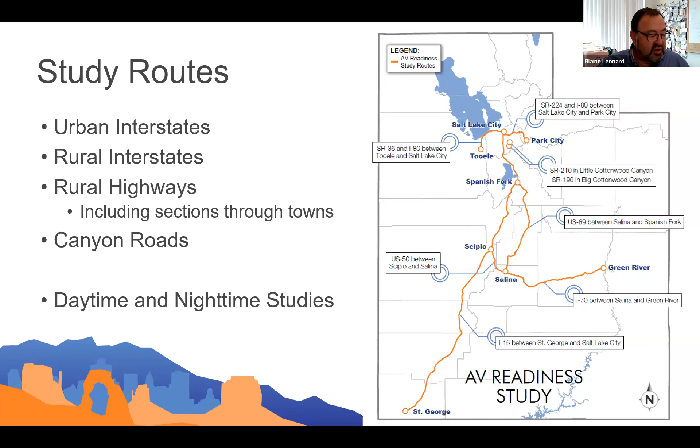We considered trying to do some studies that compared clear weather with rainy weather. We weren't able to figure out how to turn the rain on when the study was going on. So that didn't really happen, although we would be very interested in that if we could figure out how to time that appropriately. So that's sort of a summary of why we did what we did.

We're going to get a good detail today from Peter from UDOT and Phil from VSI about what we did in this study and how it works, how the systems work, and what the results were.

The study identified a few elements of the surveyed roads that need improving, such as restriping occasional faded or missing lane markers, adding on-ramp and off-ramp blend area striping, covering up ghost marking or lane scars, and utilizing high-contrast lane markers.

This allows us to start planning our maintenance operations in UDOT to say, here are the standards we need to meet with our pavement stripings, for instance. Here are the problems we need to fix. Here are the issues we need to solve.

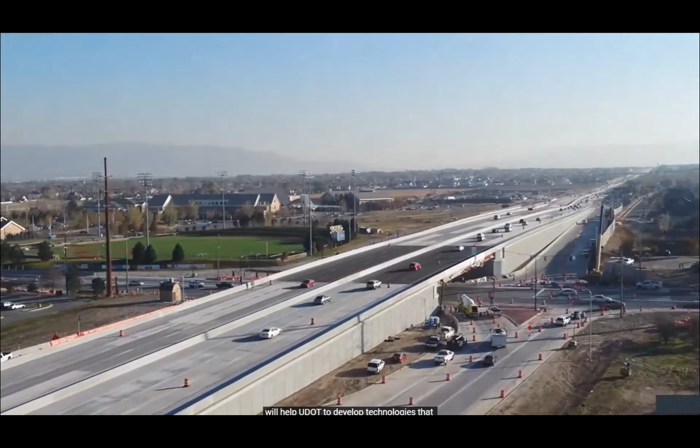To further Utah's vision of connected and automated technology in our state, UDOT will continue to research and gather data to improve AV readiness. Studies such as this will help UDOT to develop technologies that will move us significantly toward our vision of zero fatalities, improve mobility and access, and bring quality of life and economic enhancements.

Perfect. Hopefully that video helped to explain the deployment that we'll be talking about today.

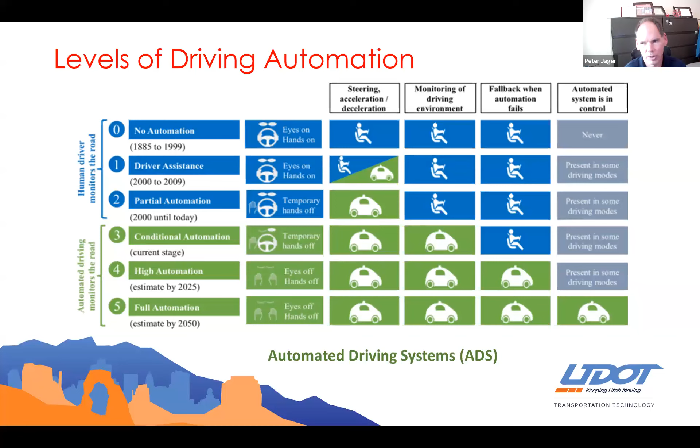But 3 and 4 are starting to be seen on the horizon here, what we're studying, where there is some partial automation and robo-taxis that are starting to exist. And in some cities, we have Cruise, we have Waymo, where you can hail an automated vehicle that comes up and picks you up, drives you somewhere within a limited area, but with no human behind the wheel. It can fully drive by itself under certain conditions and within a certain operational domain. So here, what we're looking at as the state is to see how these vehicles will operate on the roadways today.

So our primary goal here, as Blaine mentioned, is safety, 0 fatalities. UDOT is focused on improving safety for all users of the road network as well. The 0 fatalities doesn't just apply to vehicle crashes, but to protecting all users, from pedestrians to cyclists to transit users. So we need to know how vehicles will operate, not just the ones people are driving, but how automated vehicles will operate. And even today, most new cars are sold with these technologies such as lane keeping assist, automatic braking, and adaptive cruise control.

And here's more description of these technologies. So even though level 5 is far out in the future, these technologies are here now. These are on the road today. Lane departure warning, a warning system that'll warn you when your car's drifting off the road, whereas lane keeping assist will actually nudge you back into the lane, kind of like having bumpers on the side of the road to keep your vehicle in the lane. And active lane keeping or lane centering actually puts your car in the middle of the road, keeps you driving down the center, kind of like being on rails.

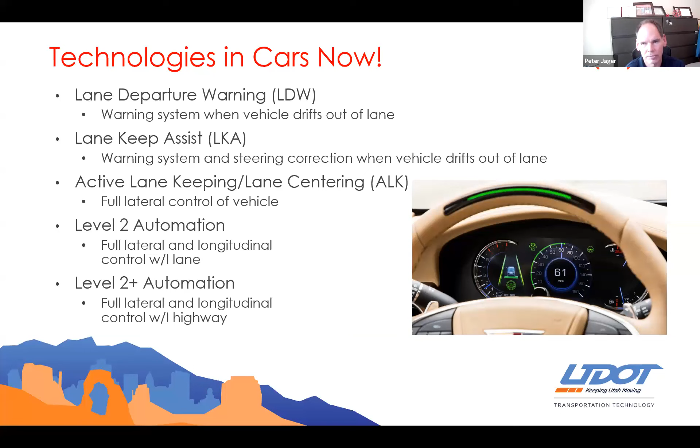So I'm going to kick it over to Phil here to talk about how cars read the road. He's going to talk more about the technology that was used in the study, and then show some of the data samples that were collected across the state as part of these studies.

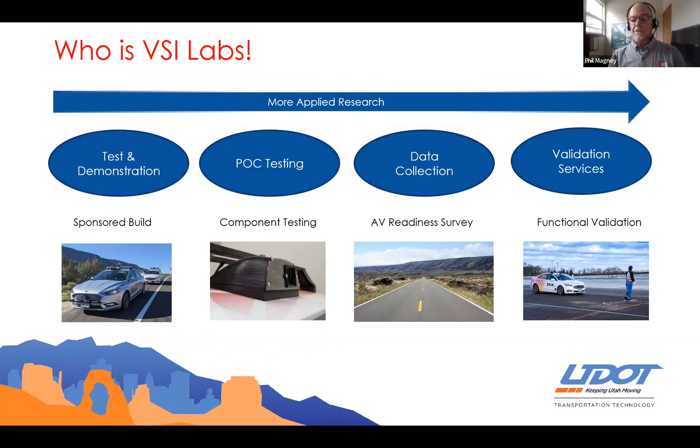So just a few opening remarks about lane markings. Really, when it comes to these technologies, they're the rails for automated driving systems. They really are the ultimate ground truth, and they do have the highest priority when it comes to applying technologies to determine where the car is going. So even if you have a highly automated vehicle with high definition maps, for example, and precision localization, and you're able to operate even when you cannot see the lane markings, in a situation like this, your GNSS probably isn't going to be accurate enough to even make that work. So at the end of the day, you're always relying on the actual lane markings to give you that ultimate ground truth.

Nowadays, it's important to point out that really most of your lane detectors are convolutional neural networks. So those are AI-trained detectors. AI has really been making its way into automotive for about the past 5 or 8 years even, because AI is really an excellent application for image classification.

And the other characteristic with AI-based detection algorithms is that they can evolve and they can adapt. As new data is collected, those algorithms get retrained, they get smarter, they're able to handle different types of situations better, and those algorithms get pushed back out to the vehicles in the fleet.

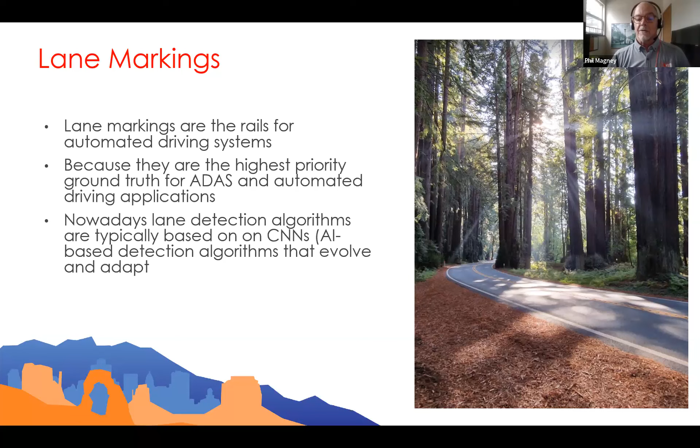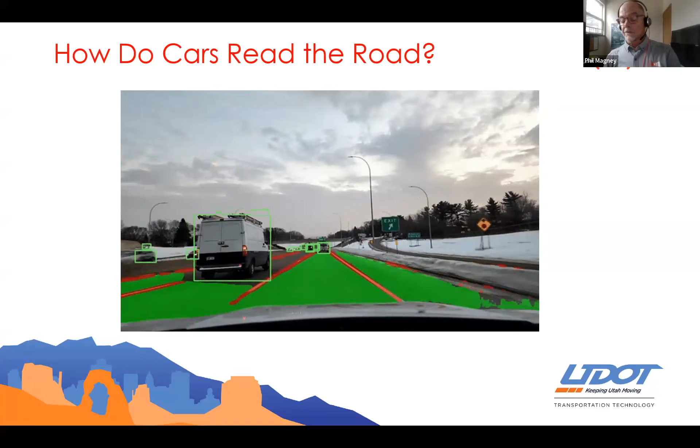The greenish area is really examining what we call drivable free space. That's telling the vehicle, look, here's the road, never mind lanes, this is the road, and don't even think about going off the green. That's what we call free space detection. And then obviously it's classifying vehicles as they go by, and it's doing a pretty good job even with the oncoming vehicles. So again, this is what the car is going through.

But the fact of the matter is, you can do a lot with cameras when it works really well. It's amazing how advanced these algorithms have become, even in the last 2 years since we started this study. The algorithms and the cameras are getting so much better too, especially at dealing with contrast and situations like that.

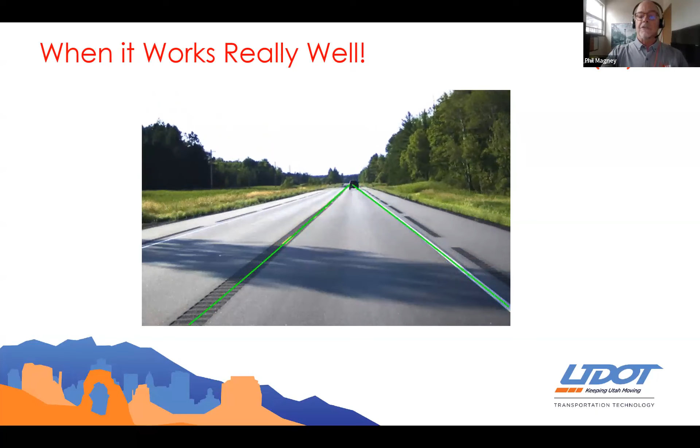Yeah, this is US Highway 2, up in northern Minnesota. It's operating on rails here. That rumble strip in the center doesn't hurt. In this case, it's not having any trouble finding the lane markings. But if those lane markings were a bit faded, having that rumble strip is actually going to enhance the detection. So we're going west with our survey in a couple months to do US 2 in Washington State. So we're looking forward to that.

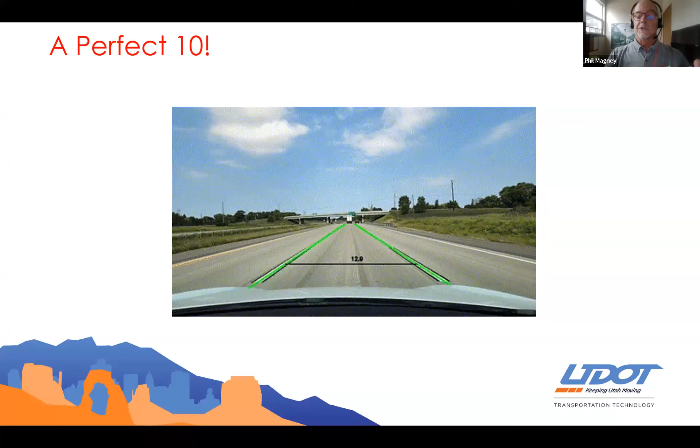A perfect 10. It's a little pixelated here, but it doesn't really look that way. A perfect 10 is 99% KPI ratings. And like I said, when it works really well. This happens to be a section of I-94 that's recently been resurfaced and done so with CAV in mind. A lot of new materials were used, different applications and so forth. We have a whole segment on I-94 that we're going to be ready to release in the next week.

So what is it? Okay. It's a survey to determine if automated features are safe on your roads. As I said, we're really out to measure the machine readability of these roads. And our goal is to call out areas where the driving systems could potentially fail. Likewise, we also call out areas that work really well, just so we can see what's going on there too. It's interesting.

And then we call out other areas that may prevent safe operation, whether it's limited shoulder width, or maybe too tight of a curve, or maybe too much of a slope and you can't see far enough ahead. So our goal is to really provide actionable insights that can be used to heighten the safe operation of these ADAS and automated driving features.

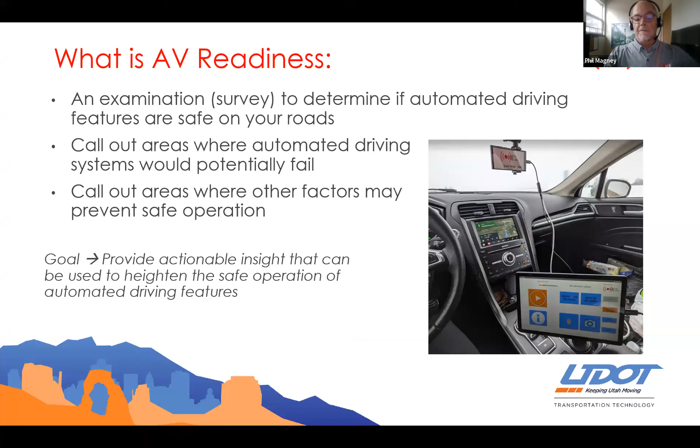So what messes things up? Well, it's all about contrast at the end of the day. These detectors are looking for longitudinal patterns, okay? And it's interesting, we'll see in a minute, but they'll actually detect seams and joints and things like that. Likewise, they can detect lane scars and rumble strips and surface material changes as well. But the contrast is key.

And against concrete surfaces, for example, in wet surface conditions and so on. Lane spacing and gaps, especially in blend areas for ramps, that causes boundary conditions. That's probably the #1 complaint of people with these technologies, is that when you get in a wide blend area like that, the vehicle will start to wiggle. Worst case scenario, on an off ramp, it could inadvertently take the off ramp.

The geometry, as I said, slope can limit the look ahead range. Didn't really have too much of an issue in Utah with that, except for the canyon roads, there we had some tight curvatures.

False positives, that's another issue that we're measuring. You've probably heard of phantom braking and things like that. That sometimes is caused by some infrastructure. And usually it's permanent infrastructure, so there's not a whole lot you can do about it, other than the makers of the radar can use it to better filter potential false positives.

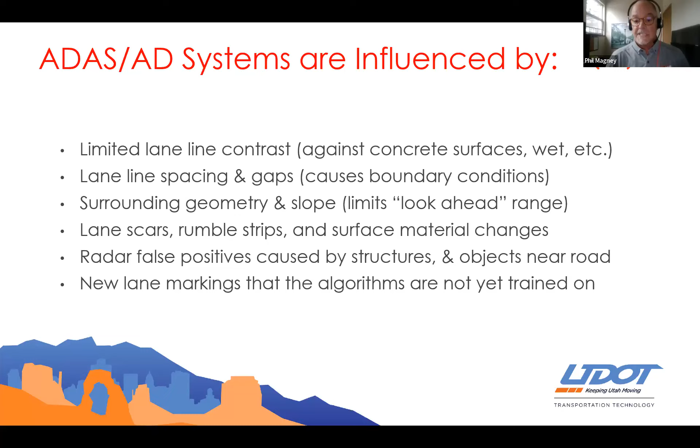And likewise, new lane markings that the algorithms are not yet trained on, that's key here. And this is the way these AI-based algorithms work. You train it with ground truth, so with all kinds of different variations of markings that it's going to see, and that is going to substantially improve the outcome.

So yeah, we do it all with a camera. We also have a lidar, and we also have radar, but since all these applications rely exclusively on the camera, that's what we're focusing on, is what the camera sees. So that's the look ahead range. That's an analytic, that's a number, based on a given threshold.

The stability of the lane detection, the confidence of the lane detection. Confidence is a number that the algorithm spits out, and when it falls beneath the confidence level, that's when the system is going to ask the driver to take over, or your automated lane keeping is going to go away or be shut down.

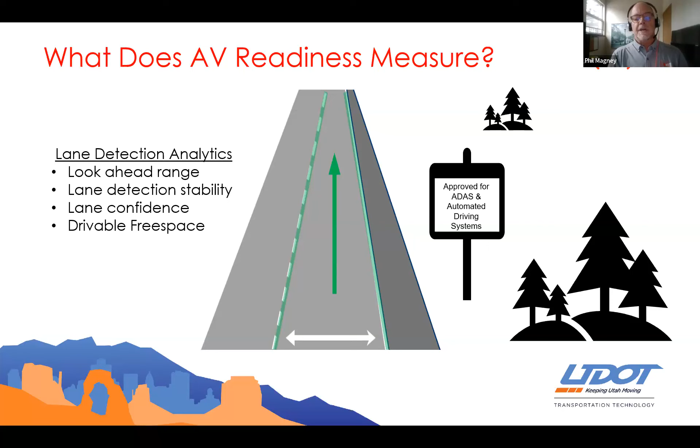And then drivable free space. We measure the width of the road now, or the width of the lane, and I mean, most of the time we know what it's going to be, but it does vary.

We operate these vehicles, they're loaded with technology: lidar, different kinds of lidar, different types of cameras, thermal camera, radar. You can see the rack system, so we can constantly change things out. We also record from behind the windscreen too, because that's important. That's where most of the installations actually happen. So that's actually a better placement. Plus, it keeps the sensors dry.

Because I tell you, when you're operating in a heavy storm, these sensors can't see anything, to be honest with you. And if it's ice, they're going to get coated and covered in no time. So really the only thing that's going to work effectively is sensors behind the windscreen, or some other mount module that's got heating and cleaning elements in it. But for our purposes, we can collect high fidelity data with our setup. We can create a digital twin because the fidelity is so perfect with the full data set.

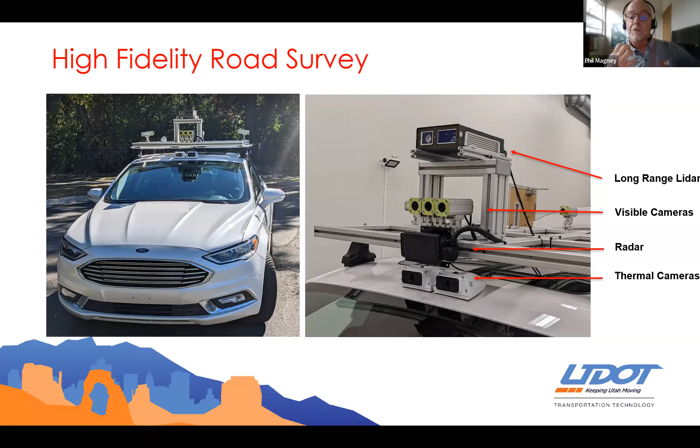We also operate a dashboard now. So our surveyor console, when we hit the road, we've got this console ready to start recording, to tag what type of situation it is or what the weather's like. We can preview our cameras. We can see how much storage we have left. We can even monitor the temperature of the computer. So we're pretty proud of that.

And then best practices. So we're running these in shadow mode, and driving a perfect line, because that's best practices for creating analytics. And then when we post process the data, we can call out all these anomalies. All the data is recorded with a lot of computer gear associated with that, and a lot of storage. The surveyor operates the console. Sometimes we'll have an engineer in the seat operating the console. It just depends on how busy they are or what the situation is like.

Driven at posted speeds. Again, best practices. If it's a multi-lane highway, we drive in the right lane unless overtaking. Okay, so this is going to expose us to all the ramps. Generally, if you're in the center lane or the left lane, you're not going to be able to pick up the ramps. So we drive a proper human line.

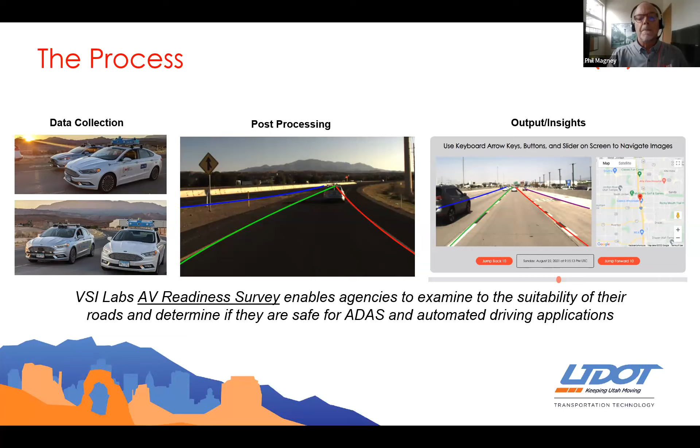We use 3 different detectors nowadays. We run an Apollo lane detector, that's open source. We run a LaneNet detector, that's open source. We also run YOLO-P, which is our most efficient and highest performing algorithm. These are open source. There's a lot of open source tools, but it doesn't mean it's plug and play. There's a lot of parameters that have to be set up to make these work properly.

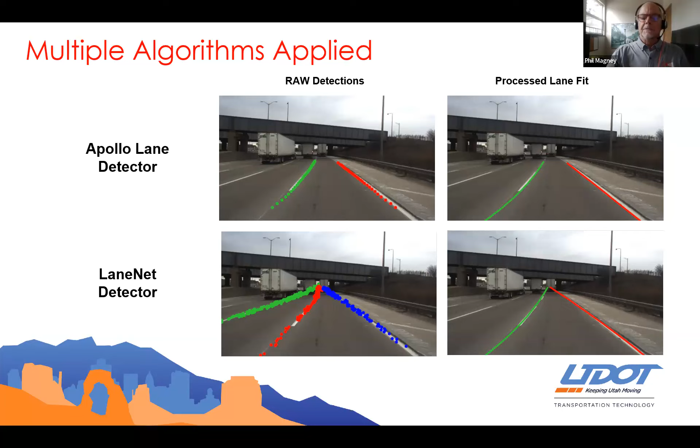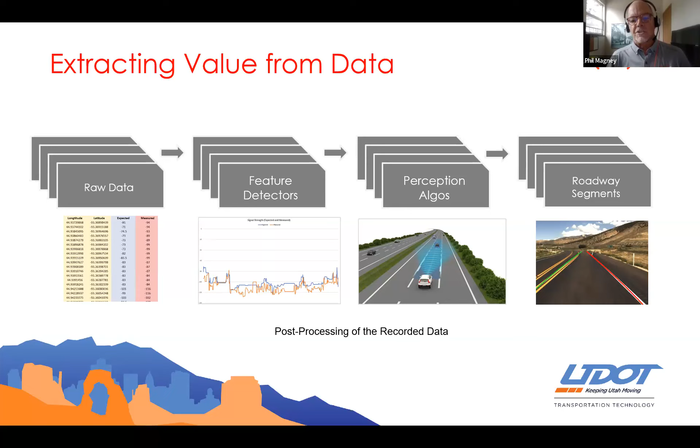And it starts with massive amounts of data. I would say in Utah, we probably had 6 or 10 terabytes of data in all. Ultimately getting that into actionable insights is the goal. So we run all kinds of algorithms on it, and post-processing of the recorded data, and then ultimately it produces the output for the roadway segments, or the campaign, as we like to call it.

This is a common scenario that anybody driving with these technologies, I think I mentioned earlier, gets frustrated with all the time. The one on the left, it can't help itself. It wants to center itself. And so when you get to this unmarked blend area, the vehicle will start to wiggle a bit. It can be mildly annoying, although not necessarily dangerous. You might say, well, why don't they just bias it to the left? Well, that would create other problems. But they're getting better at that. It's still there, though.

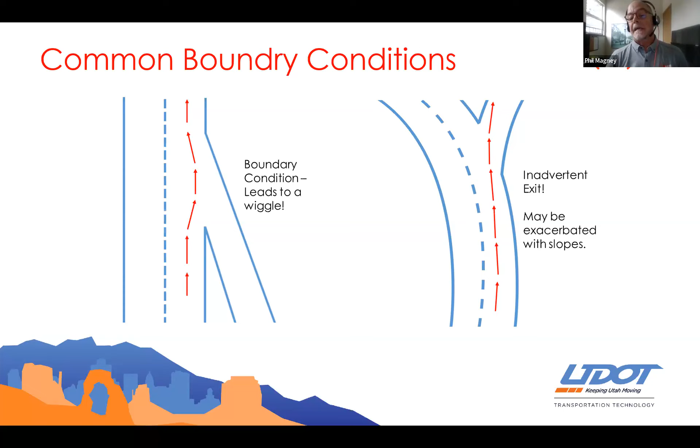On the right side, you may have a scenario that can lead to a more serious situation, particularly on a bend like this. The vehicle could easily just go straight and then ultimately get caught in that off ramp, and at speed. So, the obvious answer to that is these dashed markings. I think they're probably equally beneficial to humans or to the machine.

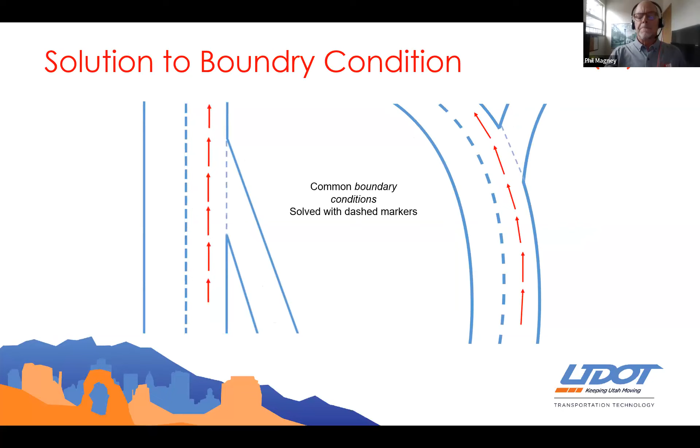So we talked a lot about the route, and so I'm just going to skip that. You got it loud and clear from Blaine earlier that we covered a lot of diversity in the road types, and so we were kind of covering all the different bases.

General observations are as follows. The interstate performance was generally very good, except areas that have been recently resurfaced. It's pretty obvious there. Not calling out the ramps here, I guess that's the next bullet anyway. We did test I-70 in both day and night, but generally speaking, interstate performance is good for all these technologies. And furthermore, I would say, if there was ever a place to use this stuff, it's going to be on the interstate. So the technologies are going to be switched on in a good percentage of those vehicles.

Ramps are probably the leading cause of confusion for camera ADAS systems, as I mentioned in the previous slide. Performance on the rural highways is generally very good, probably better than expected, to be honest with you. And we've found this in some other states as well. Some of these federal roads and state roads, even though they're 2-lane, are highly suitable, and you can expect that the technologies would be used a lot on those types of roads. The canyon roads were very challenging, tight curves, vulnerable road users, or too much traffic problem.

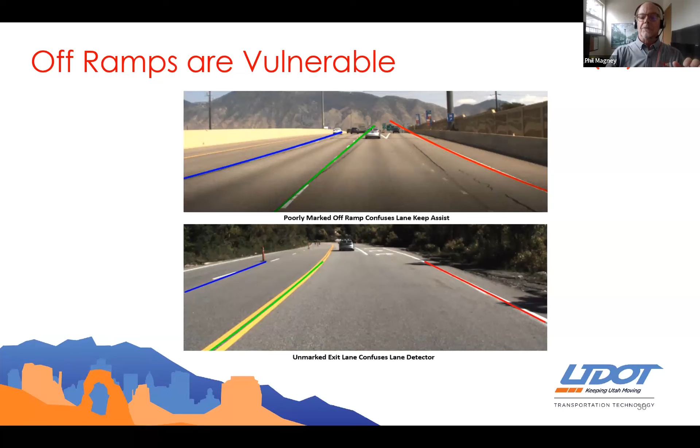This was in the video, of course. Normal detection. 5 frames later, misdetection. This is the ghost marking or previous marking that was still somewhat visible. Generally speaking, you can live with ghost markings as long as your main markings are strong and in good shape, because they'll take priority.

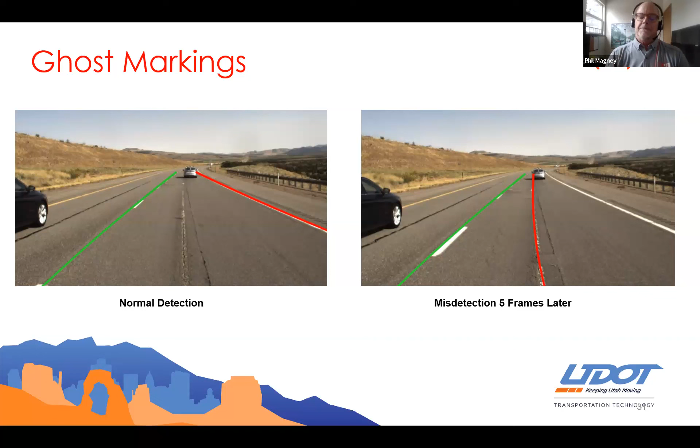You can get misdetection from tire marks, as I mentioned, or from expansion fillers, as I said earlier. It's looking for those longitudinal patterns, and it's going to build a line where it thinks there should be a line, okay? And so if you drive a Tesla or any LKA car, you'll probably notice the similar type of performance where it's able to attach to a seam.

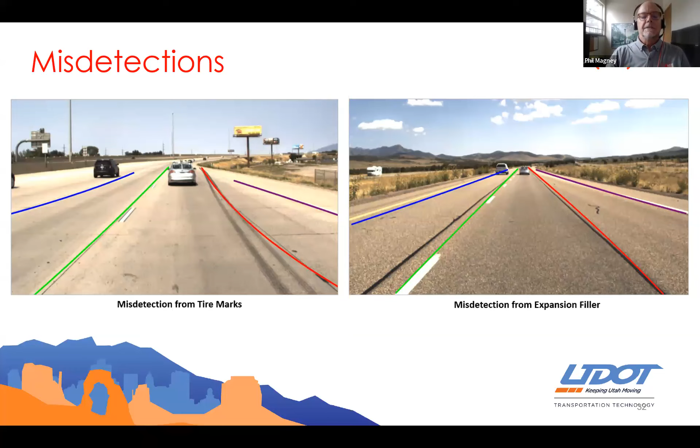In the right picture, obviously that seam just happens to coincide with where the lane marking should be. So same with the tire mark on the left. So that ended up working out.

Day and night performance. This is a very good stretch of road, particularly here. Detection is very solid, probably better in the day than at night. The retroreflectivity, I think, was pretty good, and so we didn't really have any issues.

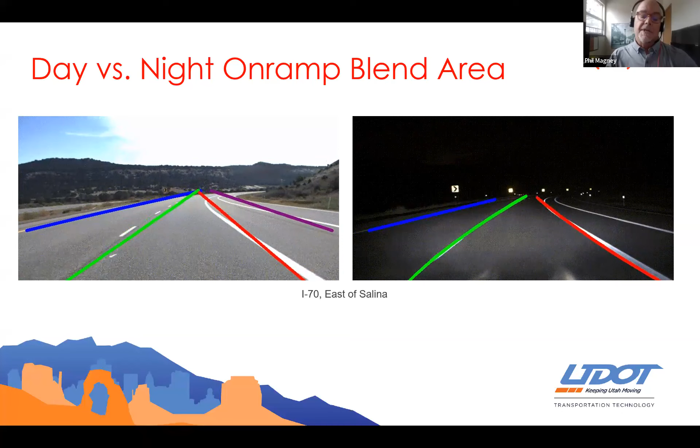The only time we had an issue at night was when we were traveling through Utah in January. We were on I-70. It was snowing like crazy, and with just the headlamps, the human couldn't see anything, so the camera couldn't see anything either, and so nothing worked.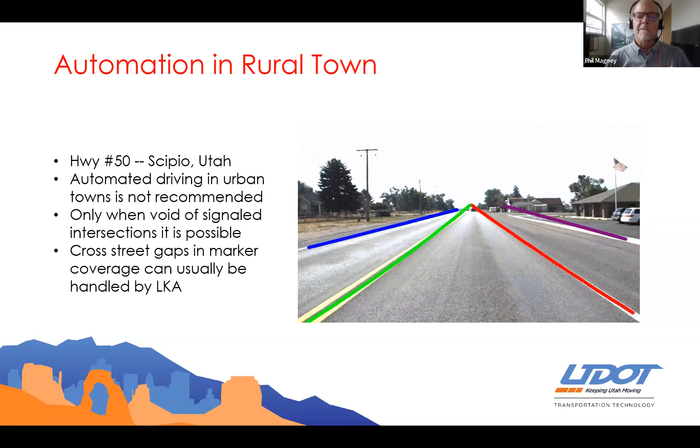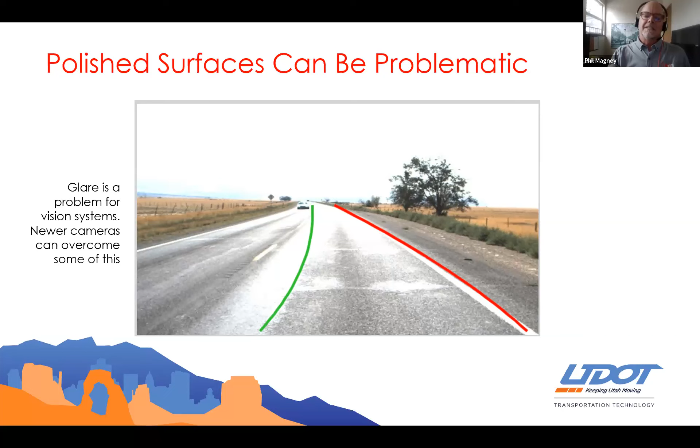Glare is a problem. I mentioned this earlier too. Here you're getting some glare, just kind of a tough momentary misdetection. The cameras, like I said, are getting so much better, though, that you're able to compensate for that overexposure that you would get in that type of situation. Like this example, our detector is working quite well here because the markings are so strong, and so that's why it can cope with this.

Even the glare situation. The only thing I would point out on this one is here again, you've got the right turn lane coming up. As we approach it, I believe right about now. And so, a dash line's probably better. See, now it's off to the far right. And so you're going to get some lane centering issues here, and then you encounter that line again.

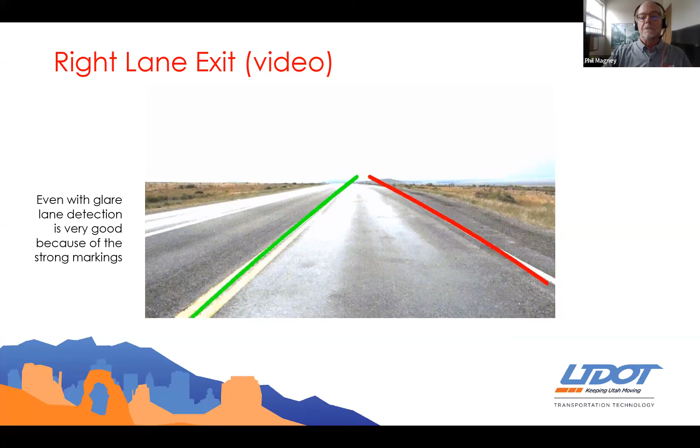So the detectors are working fine here. It's just that that particular right turn lane ideally should be marked with a dashed marker. Similarly, if you have a left lane exit on a 2-lane road, you can see the detectors are working just fine. Very good visibility, very strong detection.

But when you get to this left turn lane, I think it's coming up right about now. Yep, you see, it's totally confused, and so the vehicle would get way off center in that type of scenario.

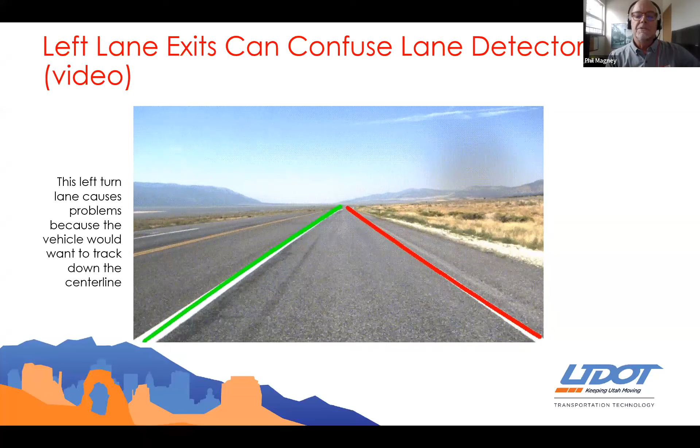Patchy surfaces, that's kind of a no-brainer. You can see it's just really struggling to have enough data to work from here. And so you see there's just a lot of bouncing around and really low scores from a stability standpoint, especially in this patchy area.

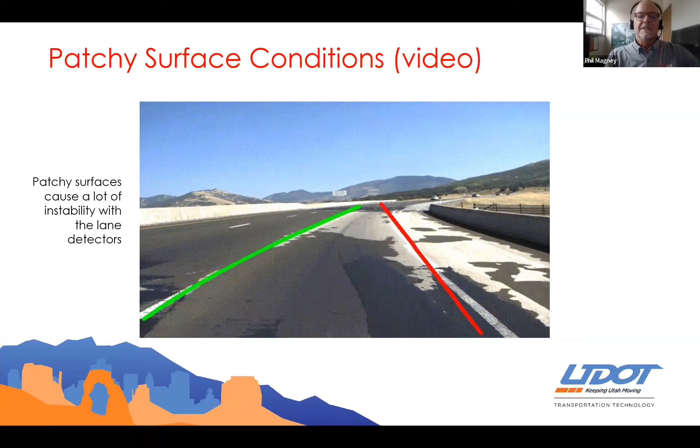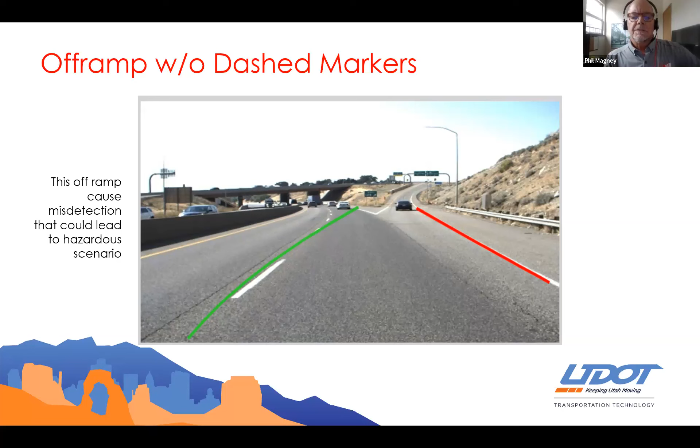This, I guess, is not a video, it's a still, but you can see here again that your detector, at this point, is starting to pull this way too. So this is a vulnerable area, particularly this one, because there is a slight bend in the road. And so the vehicle's natural sense is going to be to go straight, especially since the right lane is veering off to the right. So that's why the off ramps are more dangerous, in my opinion.

Yeah, poor markings equal poor performance. This one is just really having a hard time. It's a section that I think is largely under construction now. I'm not sure, but at the end of the day, it's all about the markings. And if there's any compromise, things start to fall off, and that's particularly on that right lane.

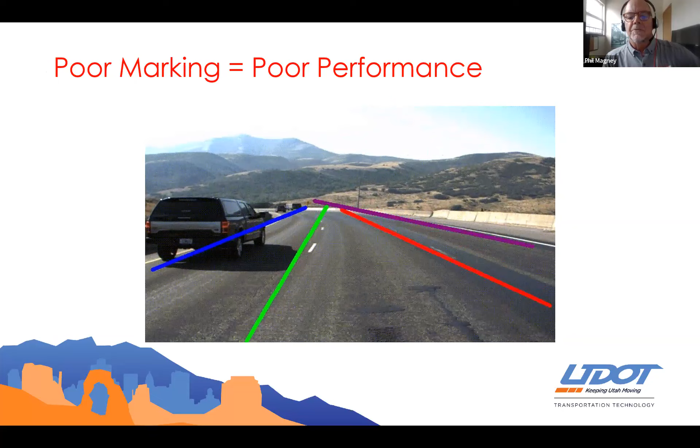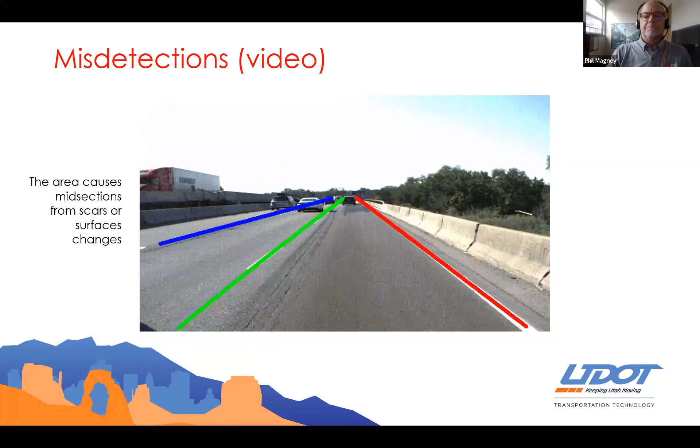And like I said before, when it works well, it works really well, and most of the time it does. But there's a reason why these systems are only operable under human supervision, because they're not perfect. And if the markings are compromised in any way, the performance is gonna suffer. It's gonna turn itself off or tell the driver to take over.

And the other thing I'd like to say too, these cameras, like I said, they're getting better all the time, but if you have a bad weather situation, and if the human can't see, there's a pretty good chance the camera can't see either, nor could lidar for that matter, okay? So just keeping that in mind. Some of the new IR sensors have a little bit more all-weather performance, but

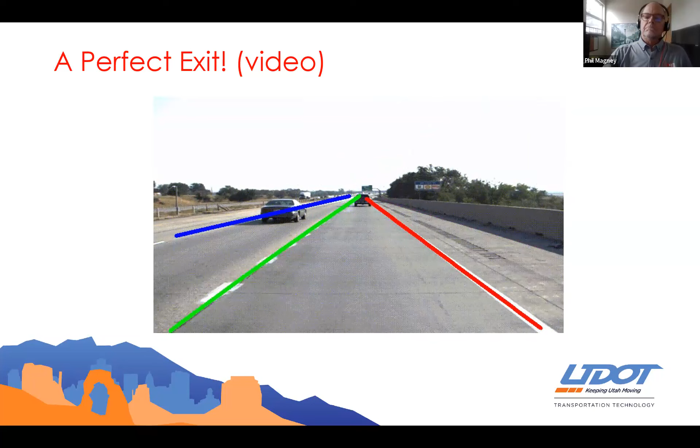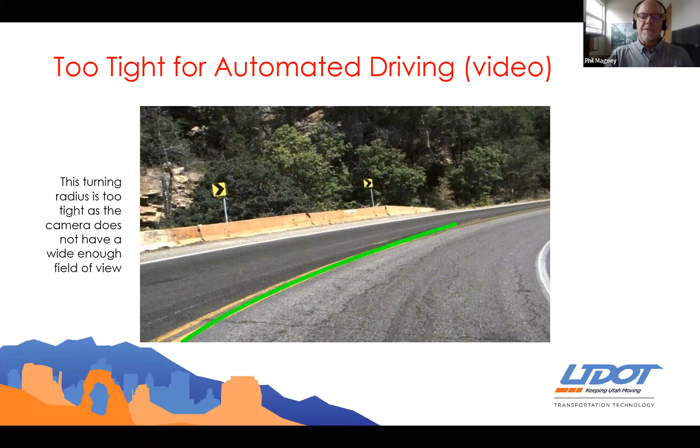anyway, I guess we have some canyon road evaluations. As Blaine said, we did both big and little, and this one's a good example of a turning radius that's just simply too tight. So it's really messing up the system. It doesn't have a field of view that's wide enough to accurately read that road, and this is probably a 10-mile-an-hour corner. Of course, I wouldn't advise the use of it because these things don't work well at slow speeds anyway. But in this case, it wouldn't permit you to operate because it can't see enough of the right lane.

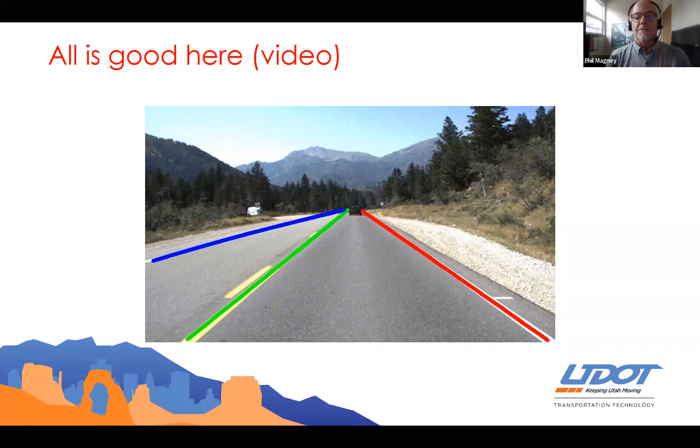Oops, yeah. When you have an area that's good, it's really good. Both of those canyon roads had fairly long stretches where things are just fine, and you can operate it without any issues at all. But sooner or later you're going to have some challenges.

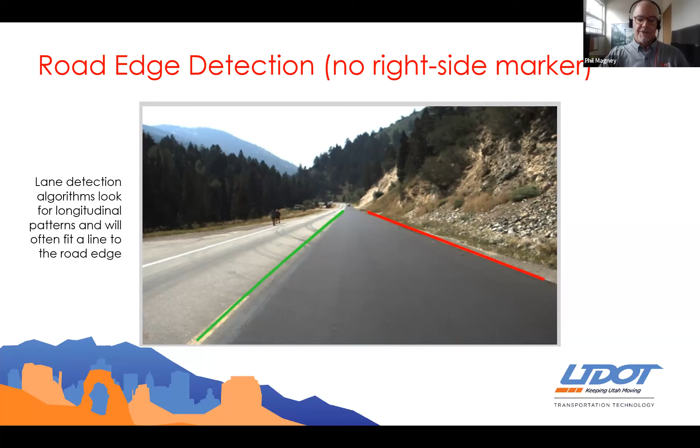For example, this is an area that was recently resurfaced, obviously, and the right detector, since again it's looking for longitudinal patterns, is able to detect that road edge, or that seam, I guess you could say, where the new asphalt meets the old, and it's able to plot a line there. So it looks for the next best thing and fits a lane or a line to where it thinks that lane edge is.

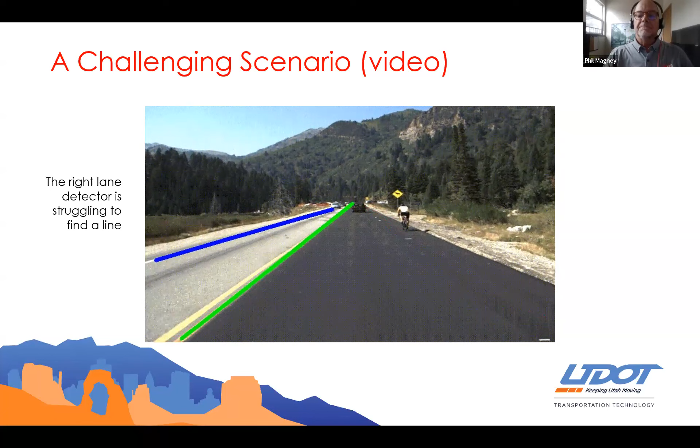Anyway, another situation where you start encountering this type of lane scar, and it's really fighting to stay on the painted line, but sooner or later it gives in, and the detector starts to think that scar is the actual line. It's bouncing around a bit, so very unstable at this point.

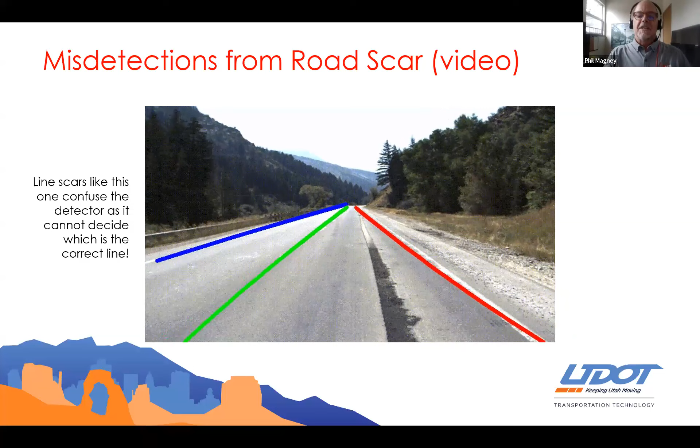So key takeaways. I'd like to say I-70, for example, is ideal for automated driving systems. We have a lot of experience on I-70 because we did that both day and night. We also think that's a terrific segment that could be applied for a commercial route. There's not a ton of exits and ramps, and it gets twisty in one part, but it's not too bad. State Highway 50 was ideal for the automated driving systems. It's straight and void of towns, except for maybe one or two.

We did 224 on the survey about a year ago, and that was fine. The markings were good, but you would require close supervision as you get close to those ski towns, again, because you have more cross traffic and more pedestrians and that sort of thing. Big Cottonwood Canyon, it's just too curvy, too many VRUs, as I said before. And of course, recent construction in certain areas was void of markings.

And I-80 is also ideal for automated driving, except within the 215 loop, just because there's too much construction. And there's patchy surfaces and poor markings, just too much going on in a construction zone to rely on these systems, in my opinion. I also will say I-15. We have a lot of experience on I-15 as well, and generally that's a very good chunk of interstate as well. High volume traffic, but very well marked.